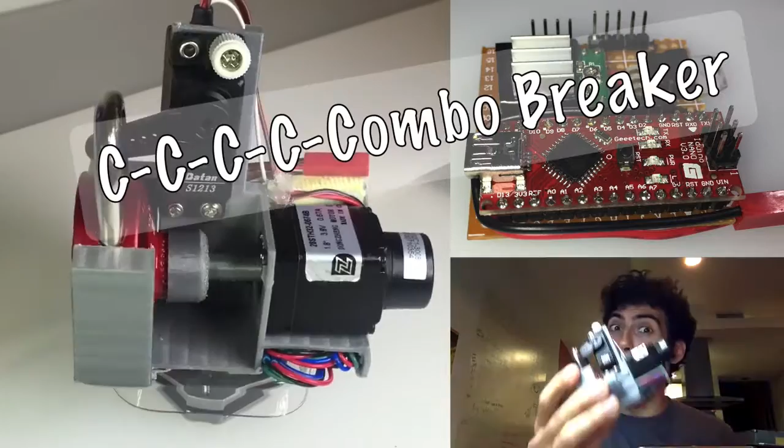Hi, I'm Sammy, and today we're going to be going over Combo Breaker. Combo Breaker is a motorized, battery-powered, 3D printed Arduino-based device that can crack any master combination lock in under 30 seconds. First, let's see it in action, and then I'll go step by step in how I designed and built this and how you can build your own.

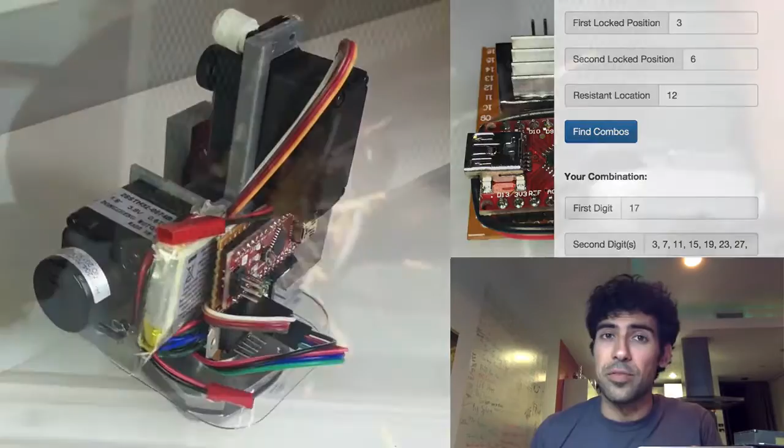Now in this video, I'm actually going to go step by step in building the Combo Breaker yourself. First, let's go over a simpler version of Combo Breaker that you can build much quicker and for much cheaper. And we'll understand some of the basic components and then go from there and build the more advanced version. First, let's determine what kind of motor we need to actually control the dial. We'll obviously need to turn the dial both ways, and we'll need some pretty fine controls.

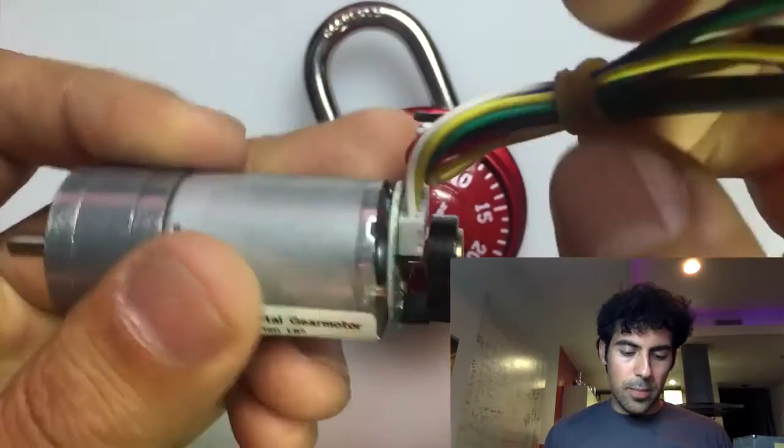At first, I thought about using something like a DC motor. The problem with a DC motor is that even if you control it really quickly or really slowly, for the most part, once you tell it to stop, it's not actually going to stop. It will actually free run for a little bit. So a DC motor wouldn't work in this scenario. You could also use an optical encoder or some sort of rotary encoder on the back to determine what position it's in. But again, as soon as you stop it at the right position, it will continue to run. So the DC motor was out.

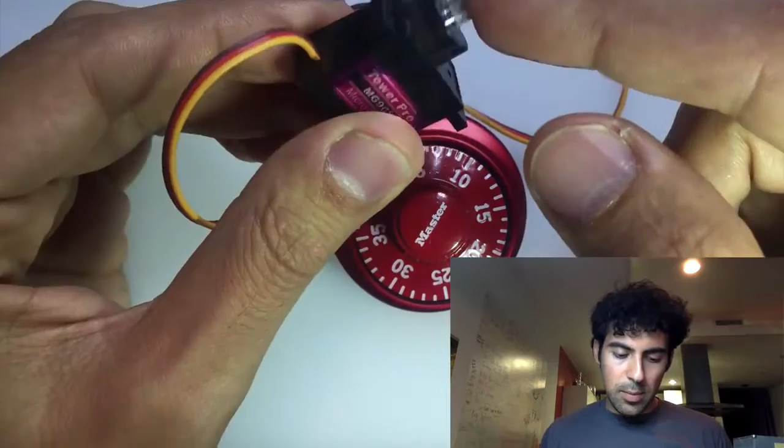I also thought about potentially using a servo motor. The servo motor, you could use a continuous rotation so that it could rotate continuously, but the servos are pretty slow because they're geared to have torque rather than to quickly control. And inside it's really just a gear motor, so we might have some of the same issues. Ultimately, I decided to use a stepper motor. In this case, you can get a stepper motor pretty cheap, like this guy right here. You can get them on eBay, and I actually link to a stepper motor that I used from the website.

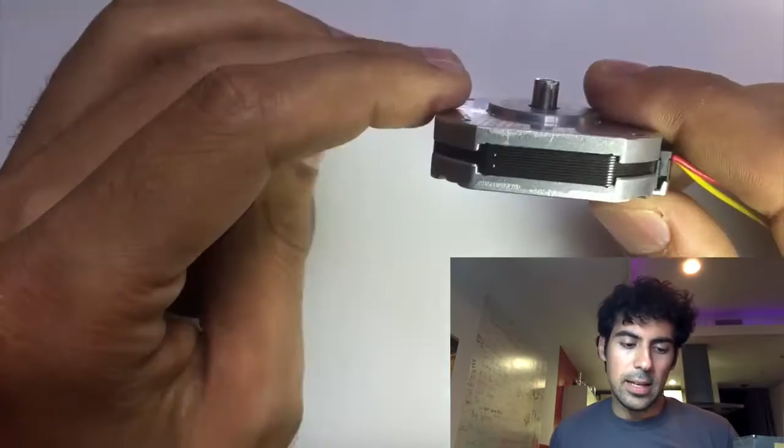And in my case, I wanted to actually use a smaller stepper motor. So I found this guy, which is called a pancake stepper motor, just because it's so thin, but it's also pretty powerful. Another thing I did was I calculated how fast it would rotate compared to other stepper motors so that I'd have one that could rotate at least a few times per second, which is pretty impressive for steppers as they're really meant for precision. The nice thing about a stepper motor is that it's very precise. When you tell it to go somewhere, it pretty much will, unless there's too much force. And as soon as you tell it to stop, it stops at that position.

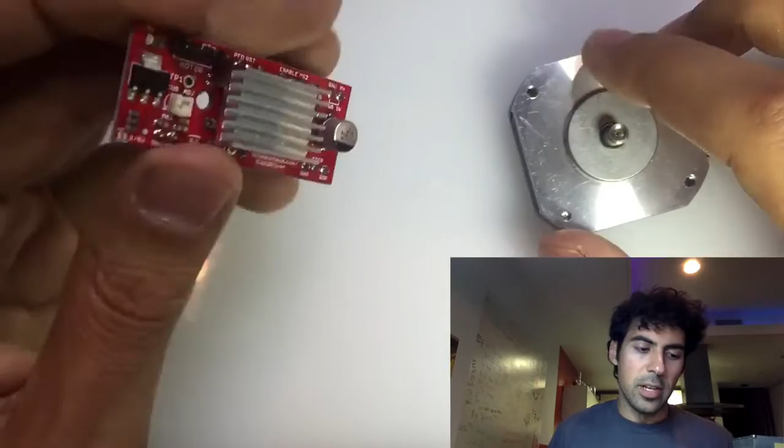The next step in driving a stepper motor is to use a stepper motor driver. I used initially an EasyDriver. An EasyDriver is a breakout board for the Allegro A3967 stepper driver. And this supports up to 30 volts and 750 milliamps for your stepper motor. My stepper that I was using could actually go up to an amp, so I wanted to drive it a little bit faster, so I actually upgraded to a smaller stepper driver, which is the Allegro A4988. And that's this little guy here.

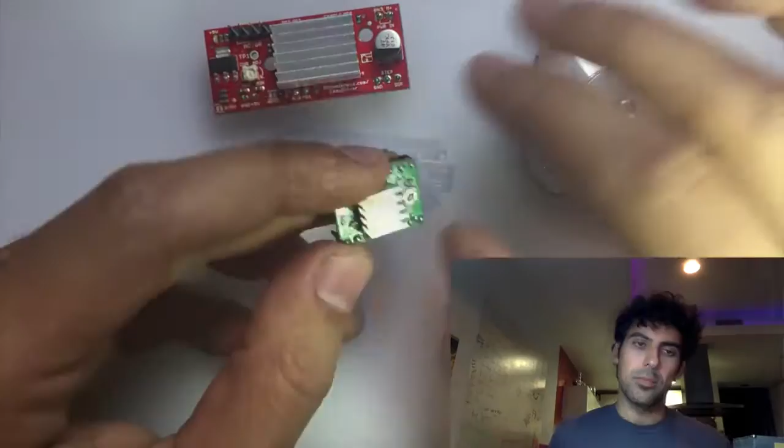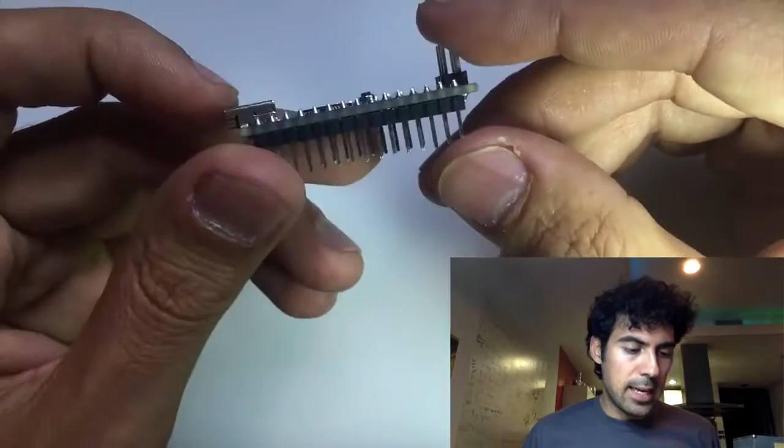You'll also see there's a little dial on there that allows you to actually control the current output. So you don't want to overdrive your stepper motor, so you'll actually want to control this and make it a little less than what your stepper is rated for. For the brains of the device, I used an Arduino Nano, specifically running an ATmega328, and I used a 5-volt version. I like the Arduino Nano. It's easy to use. It has USB for fast programming, and it has an onboard voltage regulator, so you can give it up to 20 volts and it'll bring it down to 5 volts.

Now let's actually figure out how we're going to connect the stepper motor to the dial so that the stepper motor will turn the dial. For this, I learned some basic CAD so that I could produce a 3D model and then have it 3D printed. If you don't have access to a 3D printer, you should look for a local hackerspace or makerspace in your area. I go to CrashSpace in Los Angeles. Those guys are awesome. They've taught me so much in many of these areas.

Additionally, if you don't have a hackerspace or makerspace with a 3D printer, what you can do is you can go online and send a 3D model, and I'll include some links to places that you can do that where they'll then ship you a printed piece.

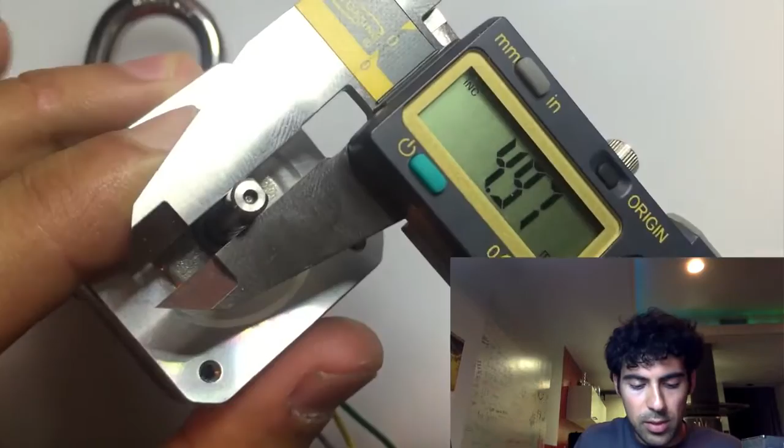So let's get some measurements here. Let's understand the size of the stepper motor shaft. So this looks like a standard sort of 5mm stepper motor shaft. You'll note that this is actually shaped like a D rather than a circle. So we need to understand both of those measurements, and we'll write these down. So we know it's 5 mil for the widest part, and the shortest diameter is about 4.5. Okay, so let's write that down. So here's our stepper motor. Just make a really big shaft here. Actually, oops. It's actually a D. That's what it is. All right.

So here we have our 5 mil, and then we'll call the shorter piece, and we'll just write over here, 4.5. Okay, and for our lock, we have the dial. So let's figure that out. And the dial itself actually is wider on the inside, closer to the numbers, and thinner on the outside. So let's get both those measurements.

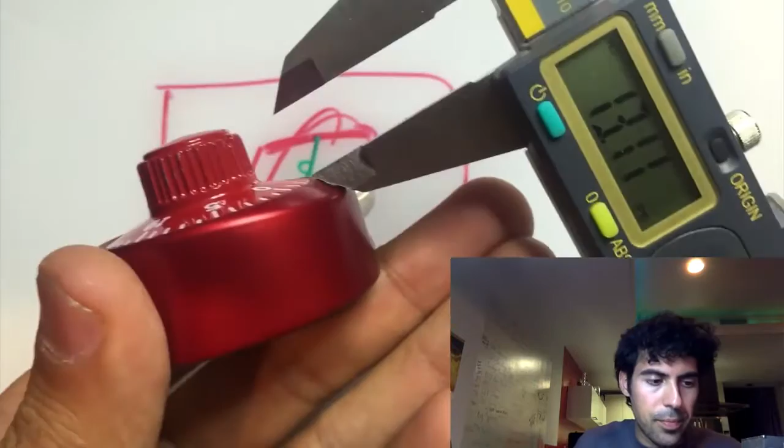All right, let's just understand sort of the widest. So it's about 19 mil. It actually goes down to 18, but 19 should suffice. And also, let's see, how long is it? It's about 8 mil. Close enough for this. So let's just do our lock here, and then we have our dial. So we will call that 19 mil, and we said it goes in about 8 mil.

Man, my handwriting. I never got past middle school.

Okay. Cool, so now let's draw it up. Now for this project, I learned some basic CAD and 3D modeling. I'm using Autodesk Fusion 360. I like it because it works on OS X and Windows. It's free for 30 days or free for 3 years if you're a student. Also, Autodesk has some other software like 123D Design, which is indefinitely free.

Also, if you can, get a copy of their older software called Inventor Fusion, which is also entirely free and is pretty good. It's actually faster than Fusion 360 and more powerful than 123D Design, although it's end-of-life. It's not as current as those software. But they're all very similar, and Autodesk themselves have great videos on their YouTube, so you can learn how to use the software pretty quickly just by going through their videos.

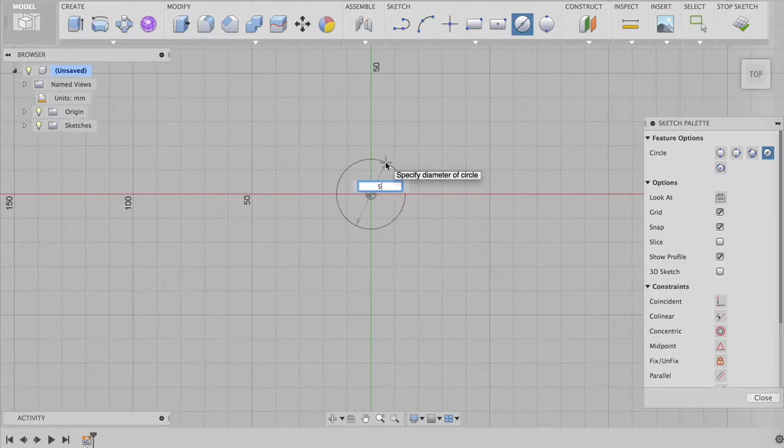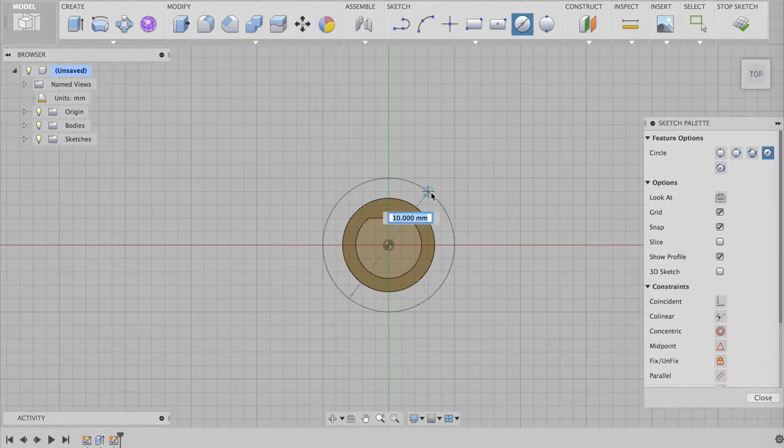First, we'll draw the shaft here. It's a D ring, essentially, or a D shaft, and we'll give it a millimeter around of thickness for the body. And now we'll want to extrude it or pull it up 15 millimeters, the length of our shaft here. Yours may be different. And now we'll want to grab the dial. So that's 19 millimeters, and we'll also want a millimeter around. So we had 2 millimeters for 21, 1 mil on each side. Give it 1 millimeter of thickness here.

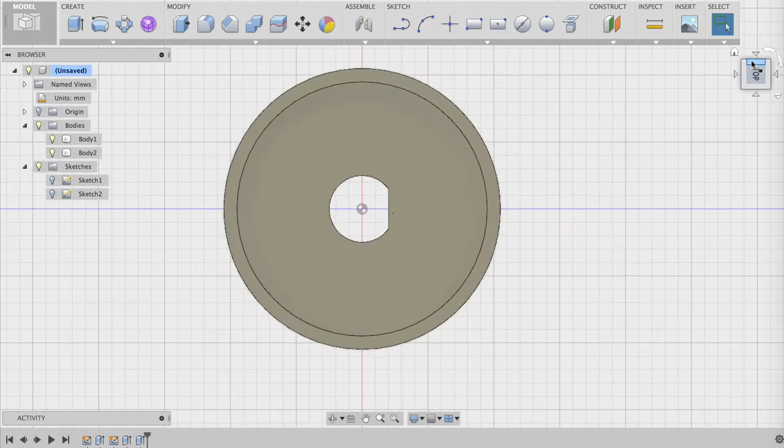Now let's go ahead and grab the dial. So that was 9 millimeters. It was actually around 8, but it's okay for some space. And let's add teeth to this guy so that it will actually grab onto the grooves within the dial pretty well. Let's create one tooth here, and let's extrude it. Actually, let's make it a separate body, and let's pull it down to the bottom here.

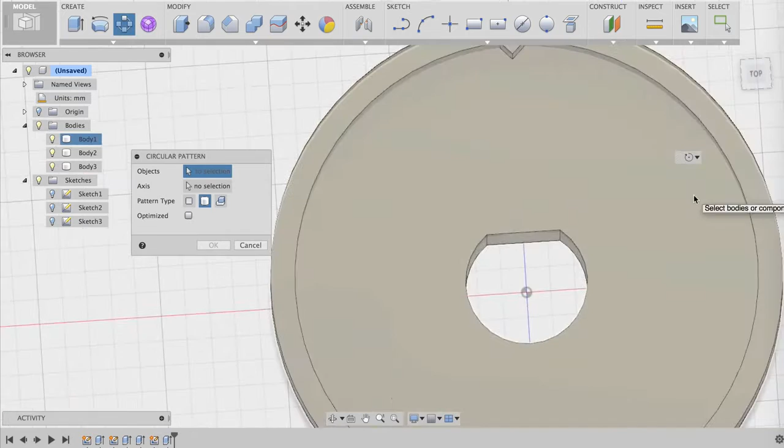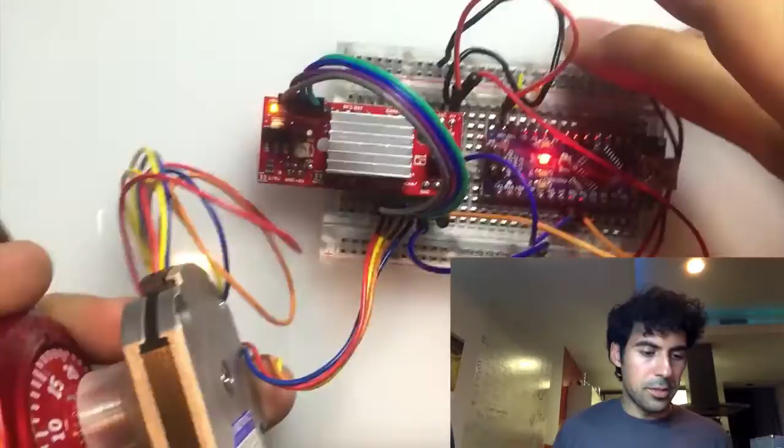And now we can pattern this around the origin. The origin is the center of our 3D space here. And we'll create 8 of these. All right, now we have that. Let's just combine the different bodies together into one piece, so it prints as one piece. And let's fillet the edge here, make it a little pretty. And that's that. Awesome.

All right, so here's our first version using an Arduino Nano, the Easy Driver, the stepper motor, and our 3D printed model. And we just have a slow turn here. You can see how it holds on pretty well. It's a pretty strong grip, so even if I'm holding it upside down, there's no problem. Both sides are gripping on really well here. And it's actually really easy to pull out and put back on, no problem. Those teeth grip really well.

And now we can start brute forcing. Now, this is the simpler version, right? So there's no way to test for the vulnerabilities in our first version or in the first videos that I demonstrated. And we also have to manually pull on the shackle. With the more advanced version, we don't have to pull on the shackle. We actually have everything done for us.

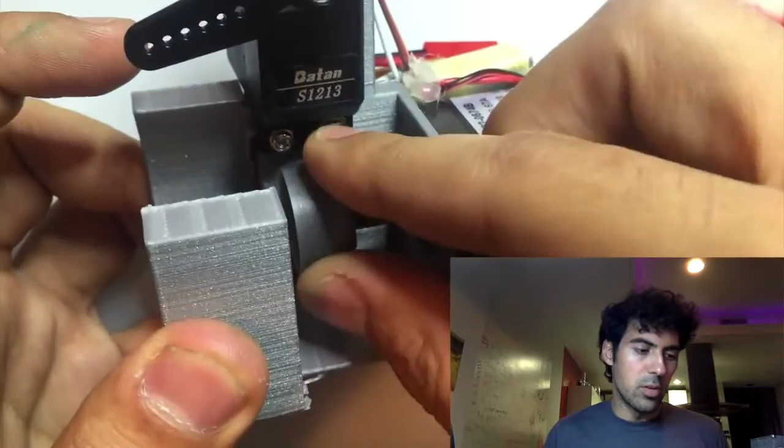We have a stepper motor, and on the end we have this optical rotary encoder, which determines the location of the dial. This way, when we're pulling up on the shackle and we can't turn the dial, our software knows that the dial is not turning.

Additionally, with the servo I'm using here, we also have analog feedback, which tells us the position of the servo horn, so that we know if we're hitting the shackle and can't lift any further. If we can't open it, then we know we did not open successfully and can return back down. And you can see everything on here.

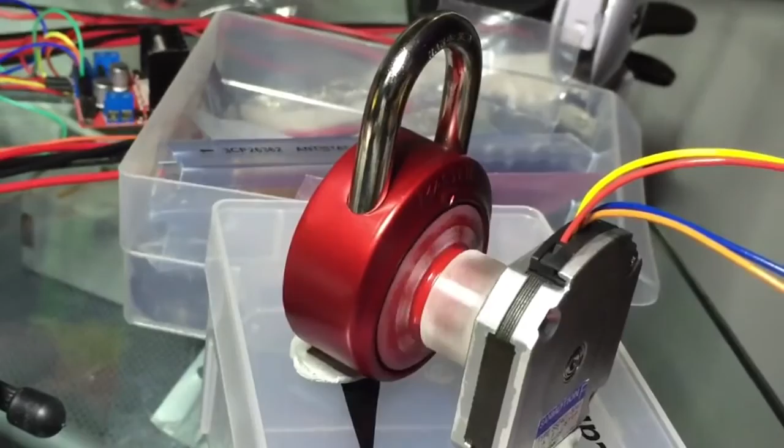So now that we have this first one down, we can create some basic software to brute force. While we're doing this, you would have to manually open it, but let's see how fast we can do some brute forcing here. So it looks like it only takes under 2 seconds per combination, even with our simplified device.

In the next video, I'll go over the advanced combo breaker and how I designed it, why I chose the pieces I did, such as the optical rotary encoder on the back and the analog feedback servo over, say, a solenoid, and other design and code decisions in building this entire thing.